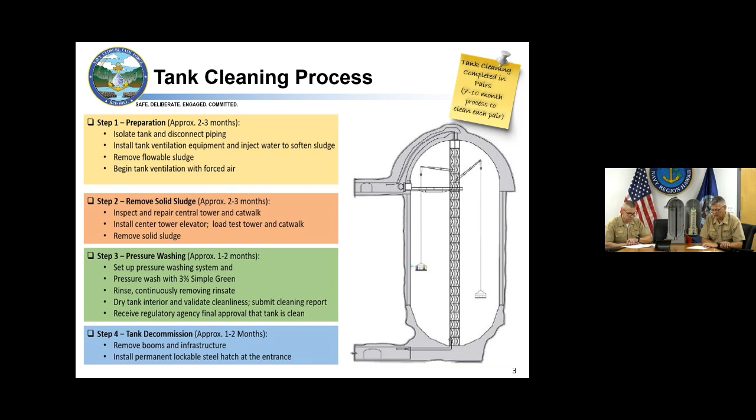If you want to go to the next slide, this is a tank rollout sheet. The very top part where you see the odd structure, that's the dome part. Then you got the middle, and then you go back down to the bottom. And so each day when the contractor goes in there, they're pressure washing, and it shows the date that they pressure washed it. It also shows the locations and time that we took any of our tests. The quality validation and also the QA, our Navy personnel can direct any additional testing if they see any abnormalities in the system.

At the end of this, the third-party quality validated person will do a report, which will be sent to DOH and EPA for approval. And again, all this has been in conjunction with DOH and EPA to create the best solution and the best plan for this system. Yeah, and just one thing there, so we talked about the SP1 process. The actual third-party validators are qualified because it's a certification. They're certified to actually do the inspections and certify that it is to the SP1 standard. And again, they're third-party certifiers that are not under our control, so they're completely independent of us.

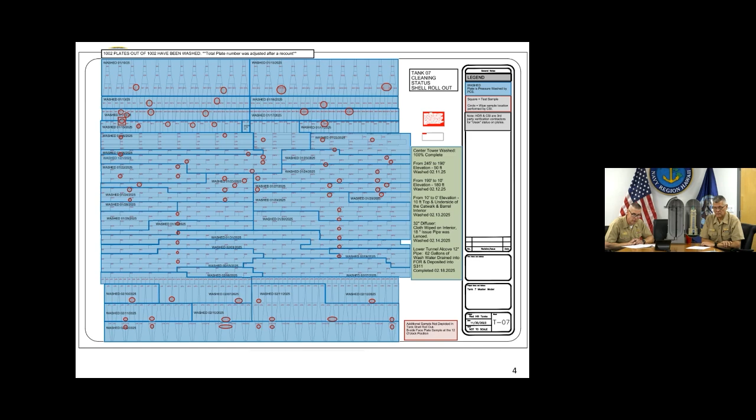So one thing, we skipped the slide, but we don't need to go back because step 4 is just pretty much finalizing, closing out the tank. So it's just putting flanges on the 12-inch, 20-inch line that I talked about before, and just sealing up the tank for whatever the future use is going to be. So now we'll move on to the next slide, and we'll go through the tank cleaning progress that we've made.

So basically 7 and 8 are in step 3. Both have completed their pressure washing, and now they're going through quality validation. 7's actually complete with quality validation. 8's going through quality validation. 5 and 6 are going through the step 2 that I talked about. So sludge is removed. Structural assessment was done on 5. Structural repairs are going to be starting on 5. And tank 6, sludge has been removed, and we're just starting some structural repairs on that also. Tanks 3 and 4, we're in step 1 right now, so we're prepping those to start the degassing, and we anticipate starting degassing in early March.

So a few things I wanted to point out on here also was I saw some misconceptions online, so I wanted to clear those up. So you have 3, 4, 5, 6, 7, and 8 that are colored, but there's also the other tanks that are white. There's 14 tanks total that had fuel in 2021 when the spill occurred. So the other 6 tanks were empty and remained empty the whole time. So let's talk about those tanks. Tanks 1 and 19, they've been empty for decades. They haven't seen fuel for decades, and they were cleaned decades ago.

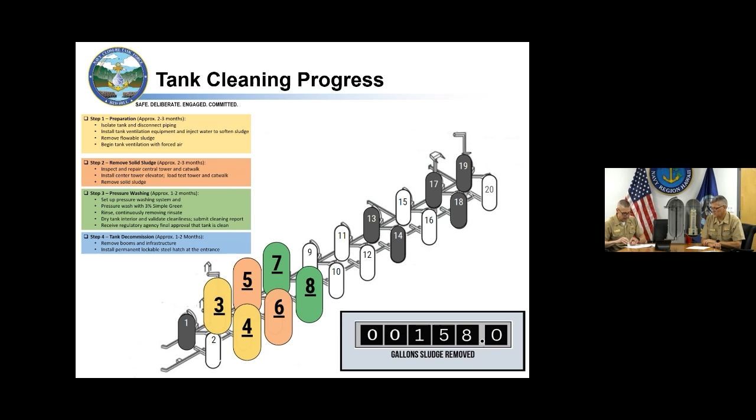And again, we've only got 10 more tanks left to remove the sludge and degas. The other 6 already had the sludge removed, and then we removed the sludge from the 4. So with that, I'll turn it over to Commander Barkley to talk schedule.

Okay, this is the tank cleaning timeline. And as you can see, we kind of color coded it with the 4 steps. Tank 7 and 8 is on plan. Tank 5 and 6 is on plan. And again, tank 3 and 4, we're starting the preparation. So everything is going good to be complete by 2028 on all the tanks.

This includes the 4 surge tanks, which we hadn't mentioned before, but those will be cleaned also. And we'll be doing 2 tanks at a time, as you can see in this. And at any one time, we could have 3 sets of tanks open. So each tank will take about 7 to 10 months as a pair to complete the process. So again, the big takeaway from this is that we're on schedule, no major issues.

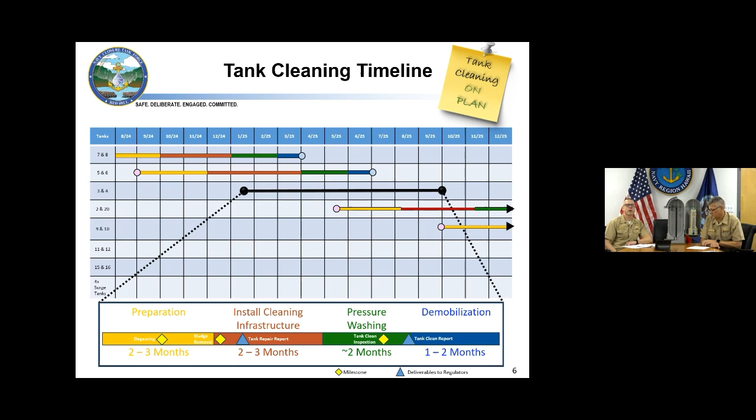Okay, so a picture's worth 1,000 words. So now we have some pictures to help you better understand. Some things I wanted to point out on this. This is the vent stack that sits outside where the gas is removed from the tank. The upper left is showing the connection to the upper tank. This is this part up here where the manway door is. This is where we're pulling out the vapors. And down below is the fan going in to the bottom. That's in the lower tunnel. That's forcing air into the tank to help remove those volatiles.

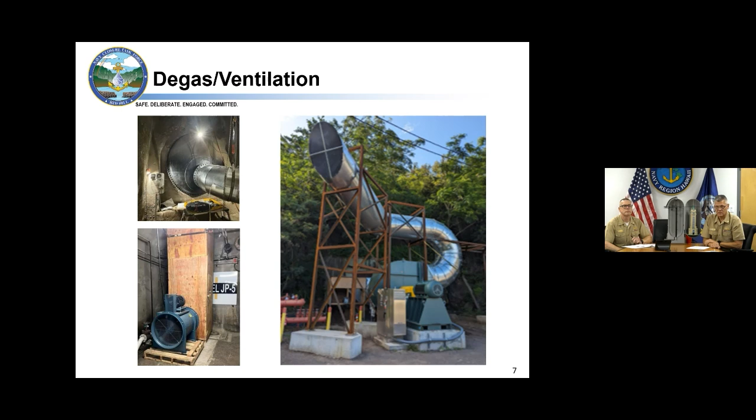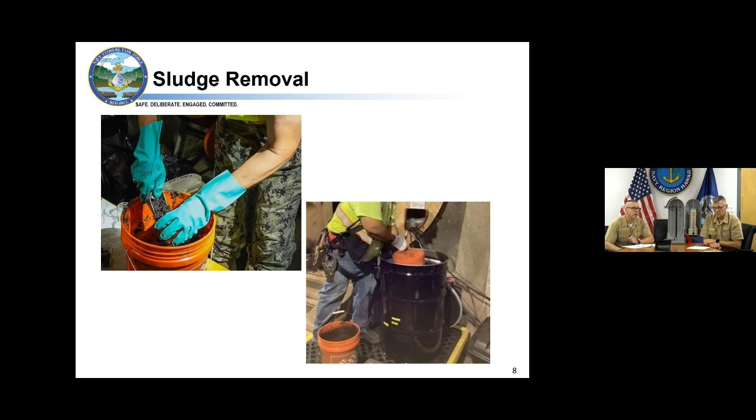Okay, so next slide is sludge removal. So as I said, there's a 2-person basket in the middle that drops down. And then they have to shovel out the sludge. You can see on the picture on the left the composition of the sludge. So it's pretty thick stuff. So they go down with 5-gallon buckets, shovel it in the 5-gallon buckets, bring them up the basket, and then out the catwalk, and then they pour them into 55-gallon drums, and then those 55-gallon drums are taken off island and disposed of. So next slide.

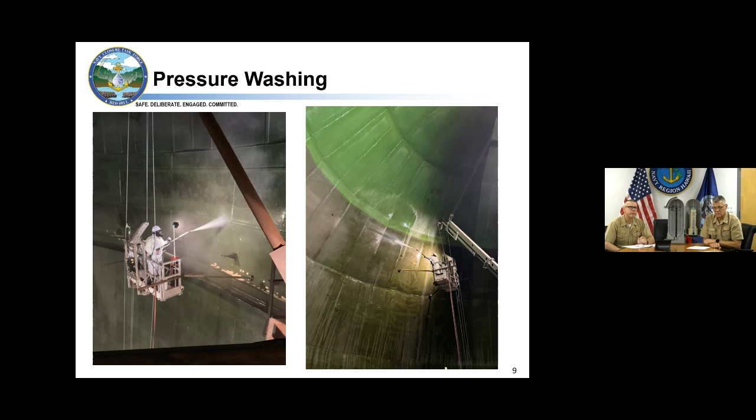This shows the pressure washing. Those particular pictures are up at the dome area up here. You could kind of see how the spider basket works, as well as the steel plates that we talked about earlier. Next slide. This is just more of the steel plates. You can see they're about halfway down, about right here, doing the pressure washing.

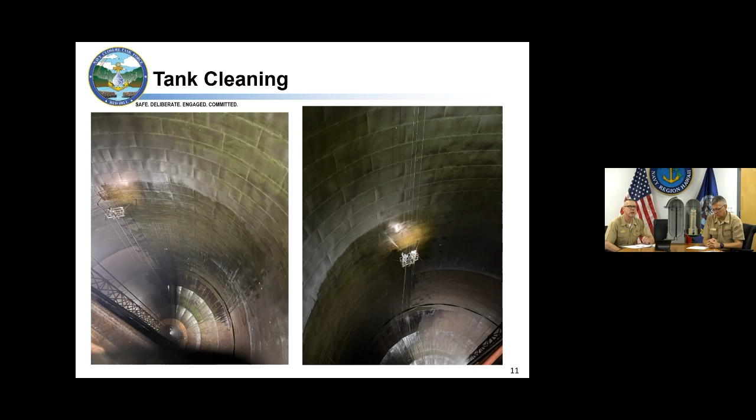Next slide. Okay, now this one really shows you the size of the tank when you see how small they look in comparison to the tank. So again, that's why it takes so long to do the pressure washing and the verification of the tank. So with that, we'll open it up for questions.

We don't have any questions yet from online, but here's a clarifying one that we can answer. How active is the DOH and the EPA participating during the inspection process? We generally meet up with EPA and DOH weekly, if not a couple of times a week. Depends on the activities that are going on. Here lately, with the inspection and the QV part, they've been coming up there at least once or twice a week. So we have regular contact with them.

They're very active on site, serving the public. They're doing a great job. Do we have any questions online?

Okay, if not, that's okay, but can you tell them how to ask questions later? After this, if you come up with a question and you need an answer, on the Navy Closure Task Force Red Hill website, in the upper right-hand corner, there's a contact. Contact us. Hit that. It'll come up to a page. You can fill out your information, how you want it replied to, and then put your question in there. Our team here will take that question and put it to the appropriate department. So it doesn't have to be just about tank cleaning. It could be about any subject coming up under Red Hill.